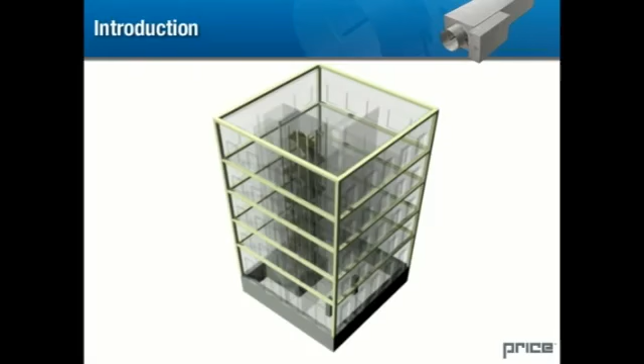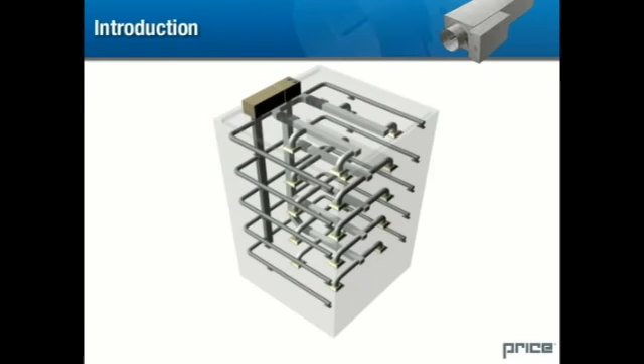The basics of HVAC. The modern commercial or office building consists of many sophisticated systems. These systems include foundation and support structures, electrical and lighting, and plumbing and fixtures. Another major part of any building that is often taken for granted by its inhabitants is the HVAC system. HVAC stands for heating, ventilation, and air conditioning.

In this unit, we will identify the purpose and goals of the HVAC system, describe basic HVAC parts, and describe how these parts work together. Air quality is an essential consideration in maintaining the productivity, comfort, and health of the occupants and should not be trivialized. If air quality and temperature are not maintained, occupant comfort in the workplace can suffer, directly affecting productivity and morale.

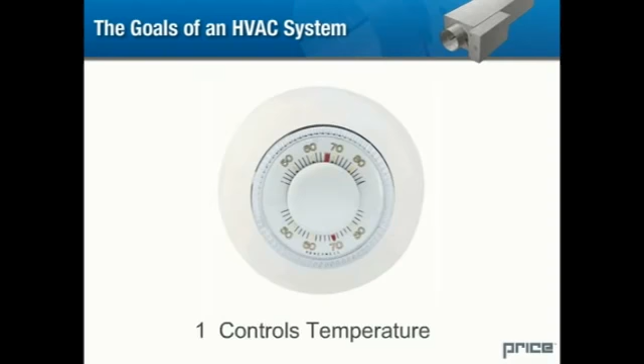The goals of an HVAC system. When examining the design of an HVAC system, we must remember the various roles that the HVAC system plays. We all know that when we're cold, we turn the thermostat up for more heat, and when we're hot, we turn the thermostat down. So the HVAC system keeps us comfortable by adjusting the room's temperature. But equally important, the HVAC system must keep occupants comfortable by supplying fresh air to a room.

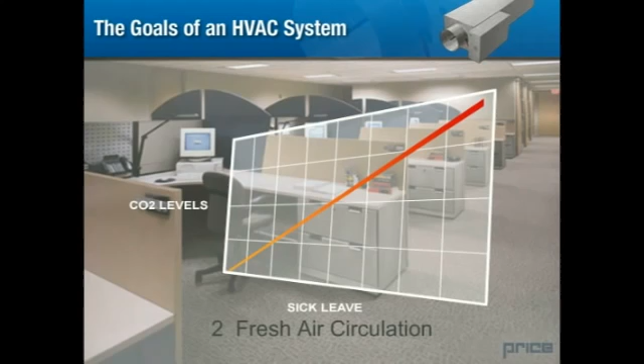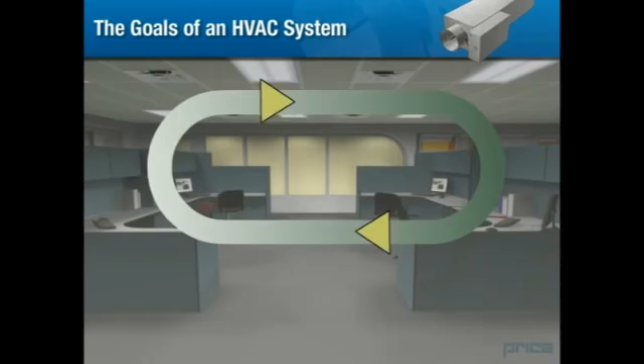If we introduce a significant proportion of fresh exterior air and alleviate carbon dioxide buildup, occupants experience better health and performance gains. Studies have shown a direct link between CO2 levels and short-term sick leave in office workforces. However, our concerns regarding the HVAC system and occupant health do not end here. In heavily air-conditioned, energy-efficient environments, recirculated conditioned air can carry contaminants which contribute to respiratory illness. It is the HVAC system's job to remove contaminants and dust from the air using filters at various stages.

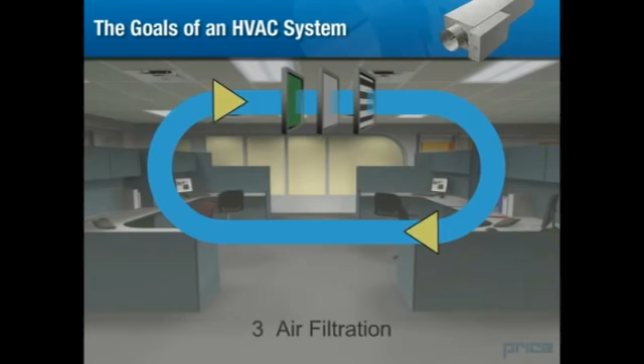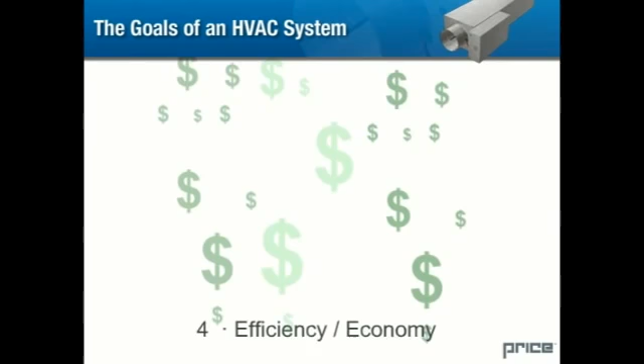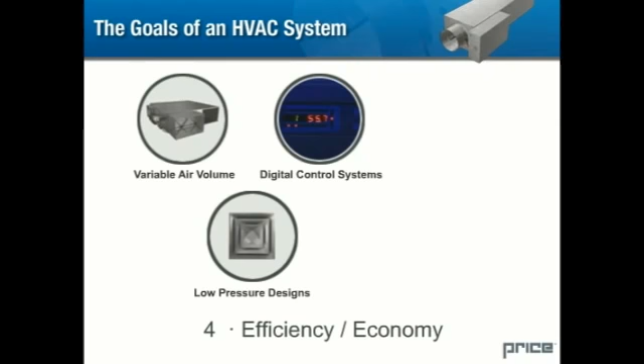As important as this consideration is in an average office or commercial building, this feature is critical in facilities that contain clean rooms, medical facilities, or hazardous materials. Finally, with the spiraling cost of fuel, HVAC systems must also be efficient and economical. Energy-efficient HVAC systems might incorporate variable air volume designs, components designed for operation at low pressures, digital control systems, mechanisms for reclaiming heating or cooling benefits from recirculated air, and high-efficiency ECM fan motors.

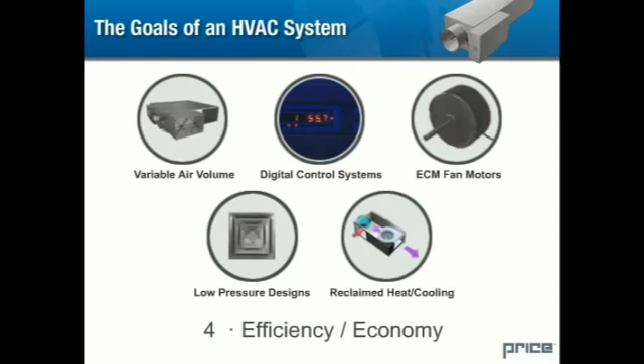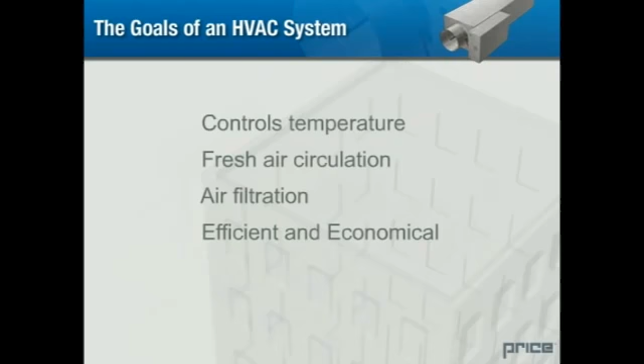By understanding the importance of occupant comfort, we realize the significance of the HVAC system in a building design. It's responsible for controlling the temperature in the environment, providing fresh air to the occupants, filtering out dust and contaminants, while operating in an energy-efficient and unobtrusive manner. The following section covers the different parts that make up a basic HVAC system. Once we understand the range of components involved, we can better understand the reasons for choosing system components from Price's extensive product line. The parts of an HVAC system.

The HVAC system installed in a commercial or office space differs greatly from the heating and cooling system that you might be familiar with in your house. In your home, your heating system is set up to deliver warm air during the winter and cool air in the summer. It does this using a furnace or an air conditioner and a common set of ductwork. When your thermostat detects that your home is too cold, it sends signals to the furnace, which then delivers warm air simultaneously to all parts of your house.

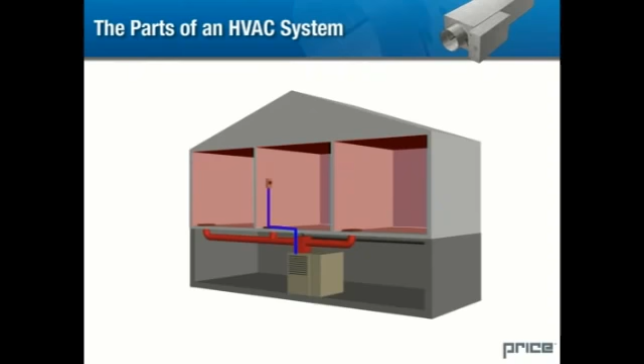Note that it is typical to have only one thermostat, and it does not account for temperature variation in any other rooms. Likewise, in the summer, your thermostat will detect when your home has become uncomfortably warm, and it will signal your central air conditioning system to deliver cool air simultaneously to all parts of your house. Again, note that your thermostat is measuring the temperature in only one room.

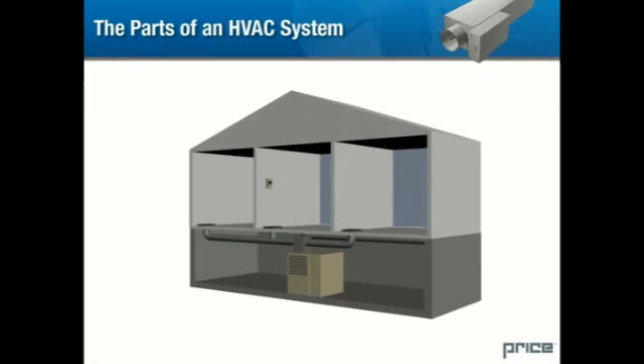The conditions in an office or commercial space are quite different. Higher concentrations of people and equipment will generate more heat, making air conditioning or recirculation of air more important than providing heat. Although the air handling equipment is centralized, different rooms and regions in the building will have different needs for heating and cooling. These needs are called loads because they place a load or demand on the HVAC system. These loads can come from equipment, people, weather, and many other factors. In the simplest case, we address this by providing a constant supply of cool air, which is then managed by the HVAC distribution system.

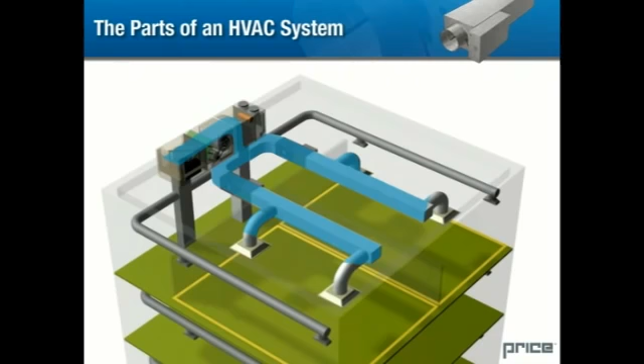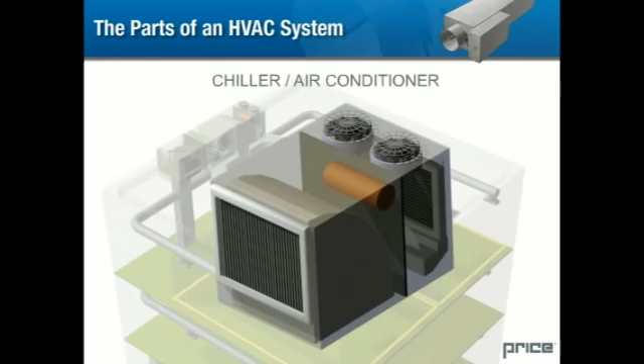The chiller or air conditioner utilizes heat exchangers and circulated fluid or gas to cool the air that is passed through it. The air handler is a fan or blower that moves air throughout the building's ductwork. Axial or centrifugal fan types may be found in the air handler.

Air filters. Depending on the requirements of the occupants and the activities in the building, various grades of air filters are used in the system. General-purpose air filters will be included in the air handler itself, while more sophisticated filters, such as HEPA filters, may be used in the downstream ductwork.

Ductwork. Round, square, and rectangular ductwork provides a path for the conditioned air from the air handling unit to the environment. A damper consists of one or more blades which can be used to control the amount of airflow through a duct. Manual dampers are used to ensure that different parts of the building receive proportional ventilation based on area and demand. Automated dampers may be installed at firewalls which close in the case of a fire.

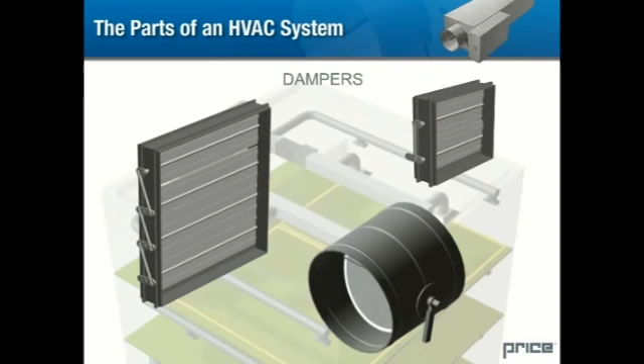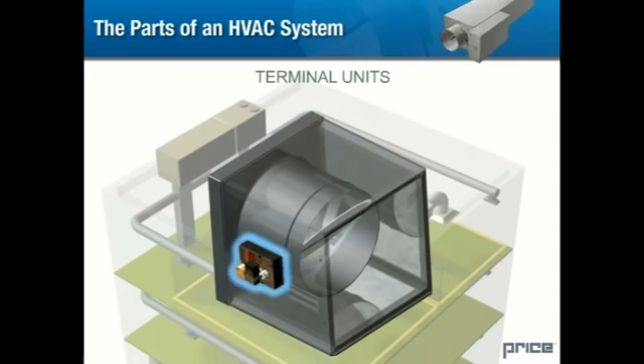A terminal unit is a device that uses an automated damper to control the amount of air which is delivered to a room or region. The damper is typically controlled by an electric, pneumatic, or digital actuator, which in turn is regulated by a thermostat.

A set of adjacent rooms or regions in a building which have identical heating and air conditioning needs are called a zone. It is typical to assign at least one terminal unit and corresponding thermostat to each zone. Price manufactures many different varieties of terminal units to suit all types of building needs. We discuss terminal units in greater detail in the forthcoming terminal units section.

Heating coils may be installed after a terminal unit to provide heat on a zone-by-zone basis. As mentioned previously, buildings with a high number of occupants may not require extensive heating even during the coldest months of the year. Heating coils offer an efficient way of providing heat for those few areas that require it and are controlled by the same thermostat system as the terminal unit.

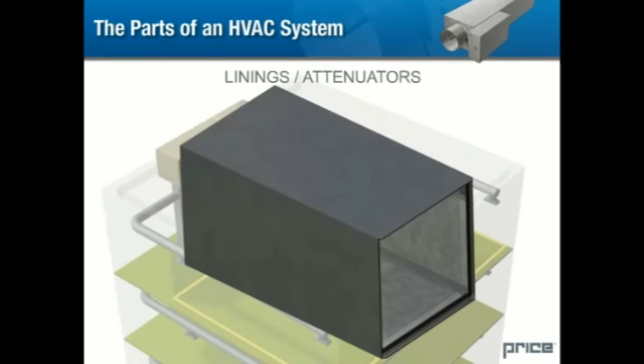Various types of linings are available to dampen noise within a duct. A short length of lined ductwork, called an attenuator, is often installed following the terminal unit to dampen discharge noise.

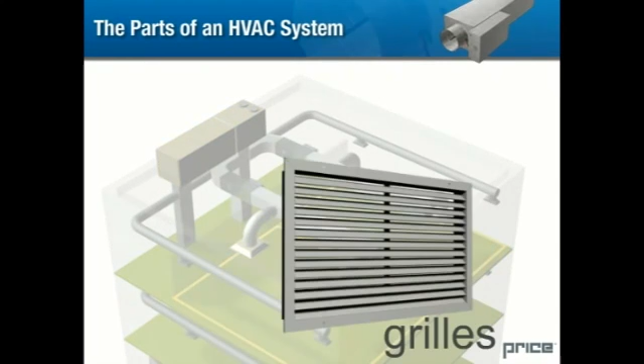Ultimately, the test of an HVAC system lies in its ability to deliver conditioned air to the occupant. Air from the ductwork enters the occupied space through grilles, registers, or diffusers, often called GRDs. The term grille is commonly applied to any air outlet or intake that consists of a square or rectangular face and neck, and whose facial appearance is made up of louvers which may be used to deflect the air.

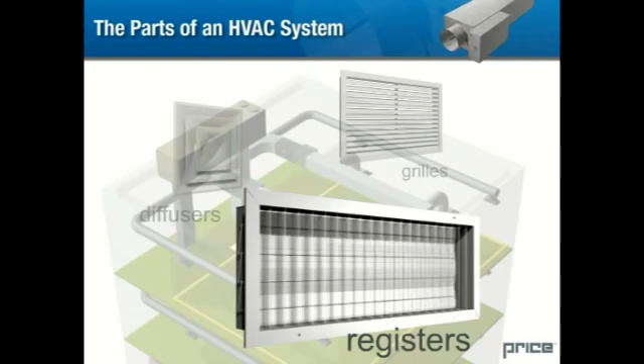A register is a grille that has one or more adjustable blades or dampers that control the amount of air that flows through. A diffuser is an air outlet which incorporates structures such as vanes, louvers, perforations, and other features for distributing and directing air.

The diffuser's job is to direct the airflow throughout the occupied space in the most efficient manner possible. More information on desirable air patterns is provided in the space air diffusion section. We will discuss diffusers in more detail in air outlet selection.

Once air enters a space, where does it go? Air circulates through the return inlets and returns to the air handling unit. Unlike an air outlet, a return requires no sophisticated vanes. However, the relative location of the air inlets and outlets can be critical to the efficiency of the system.

Upon returning to the air handler, a certain portion of the return air is exhausted and replaced with fresh exterior air. In an average office building or commercial space, this is approximately 10 to 20%.

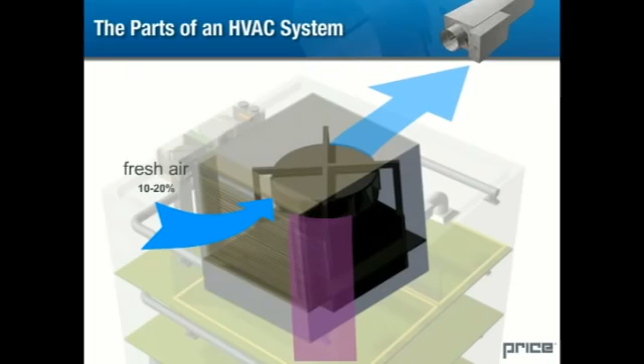The preceding information offers a very basic overview of the components that make up an HVAC system. Throughout the remainder of the training module, we will examine many of these components in greater detail. We hope that you've enjoyed this introduction to the basics of HVAC.